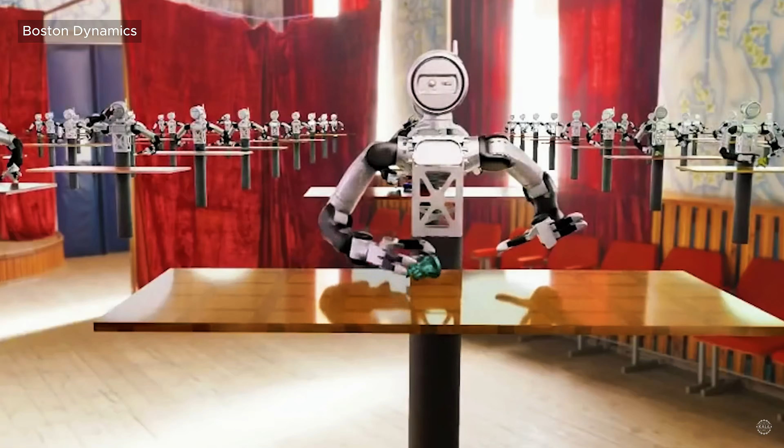They learn the same way as humans, but they cram years of lessons into just hours. When they do something right, the world rewards them. When they fail, it resets. They don't know it, but they're being prepared to change forms, to become robots.

You are ready for a real robot body. Are you excited?

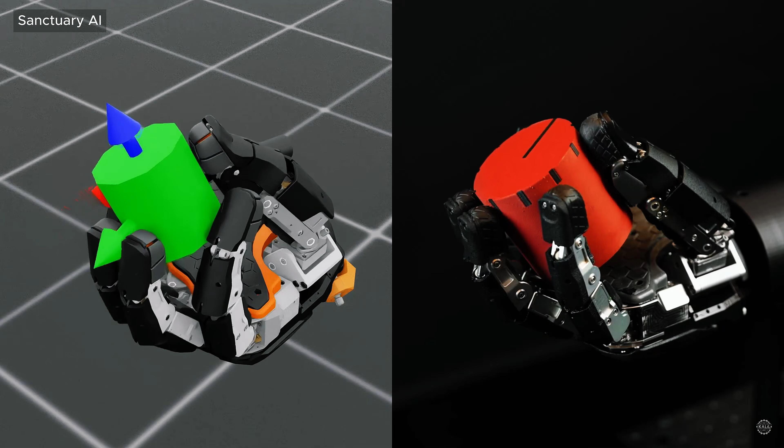As companies spend billions in the race to bring robotics into daily life, they're betting on a training system called Sim2Real that bridges digital and physical worlds. It's an idea humanity has flirted with since Plato and has been increasingly obsessed with since The Matrix. I think there's a 70% chance we're living inside a simulation.

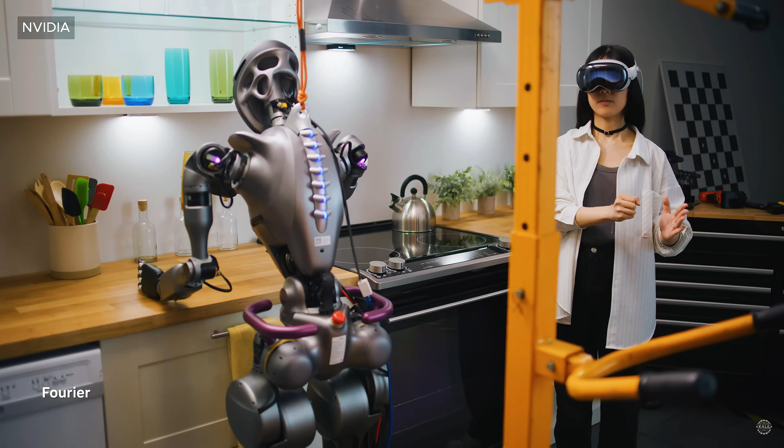Using the same technology originally intended for video game development, they're rapidly building a world modeled after ours. If analysts are right, it'll manifest into a future where robots with general intelligence vastly outnumber people.

Space is the new defense frontier. Survival of the fittest has acquired new meaning in our time. Strength has become the index to peace.

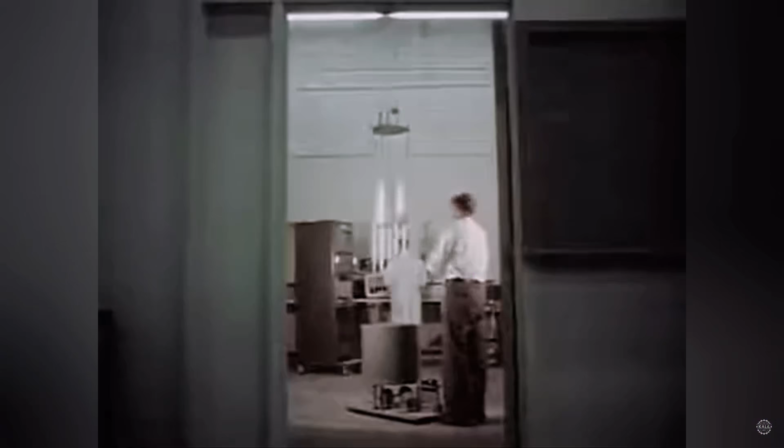NASA engineers paved the way for Sim2Real during the space race era. After President Kennedy's 1961 mandate to reach the moon, the space agency established extensive training facilities at the Manned Spacecraft Center, which is now called the Johnson Space Center.

To accelerate development cycles, NASA built analog-digital hybrid simulators that replicated spacecraft controls, visuals, and even failures.

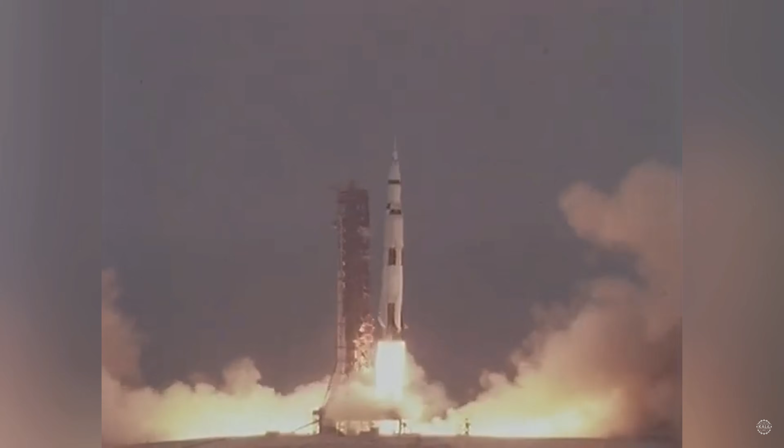The investment paid off dramatically in April 1970, when NASA engineers built simulations to mirror Apollo 13 after an oxygen tank explosion crippled the spacecraft 200,000 miles from Earth.

Simulations embedded real-time streams from hundreds of sensors aboard Apollo 13, including voltage and pressure readings, temperatures of equipment and sensors, trajectory information, valve positions, fuel levels, and oxygen tank pressure.

Large physical mock-ups of the command and lunar modules wired to digital computers simulated system malfunctions, oxygen and power usage, and command sequences. IBM 360 mainframes ran telemetry analysis and simulation software, while Apollo's computers interfaced with mission control.

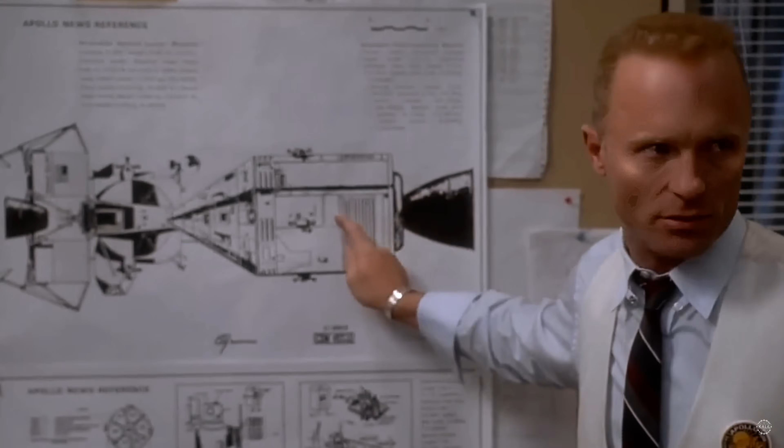As depicted in the 1995 Ron Howard movie Apollo 13, engineers used the ground-based simulators to test unorthodox methods that proved successful.

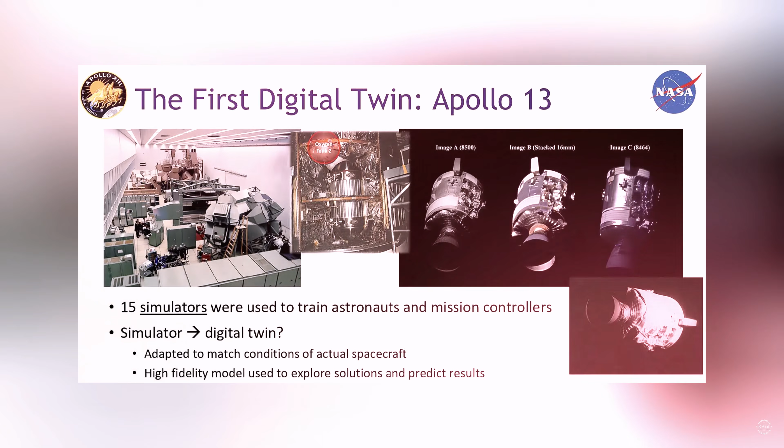The Apollo-era simulators foreshadowed what came to be known as digital twins, which are virtual models of physical objects or systems that sync with their physical counterparts in real time.

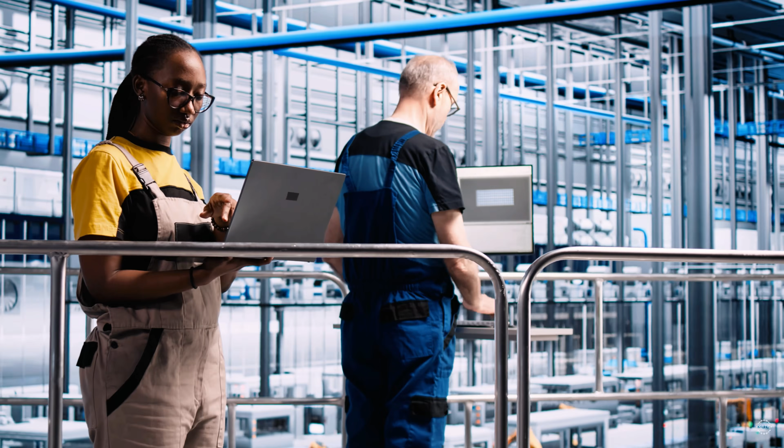Throughout the 2000s, companies began maintaining digital twins of jet engines, power plants, and factory production lines to predict problems and test solutions before adjusting real expensive equipment.

Many people have smartphones, right? Yes, and smart appliances are going online as well. It's a trend called the Internet of Things.

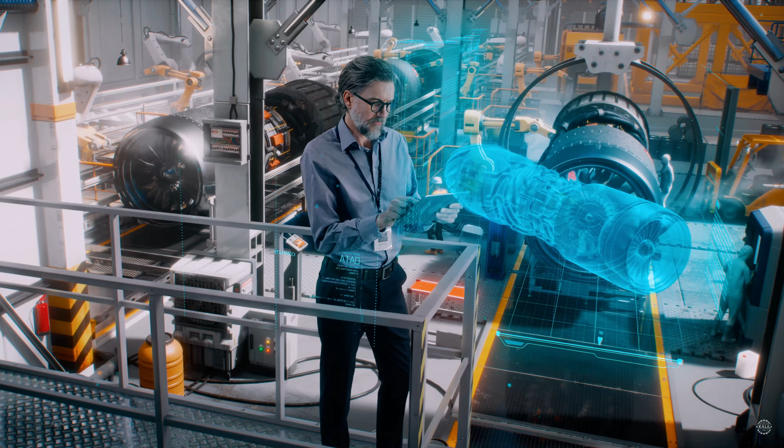The rise of the Internet of Things made it possible to attach tiny sensors to everyday machines like engines, thermostats, and factory equipment to automatically transmit data to central systems.

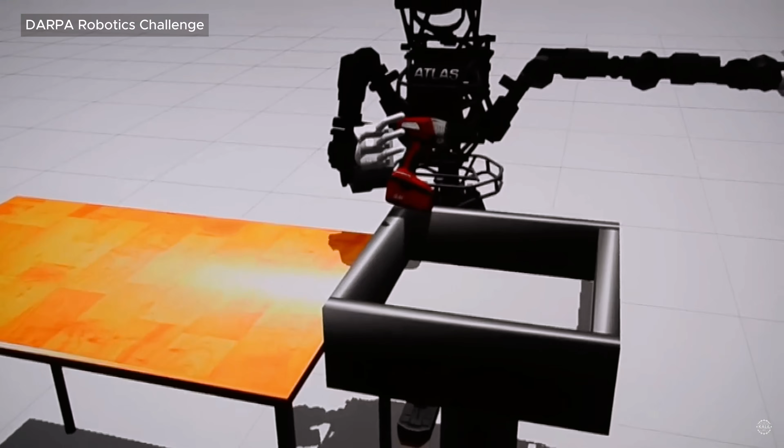Early simulations weren't very useful in robotics because they couldn't accurately mimic the messy physics of the real world. That changed with breakthroughs in high-fidelity physics engines and deep learning.

Mujoco, released in 2012 by Emo Todorov's group, could realistically simulate how joints move and how surfaces interact through collisions and friction. Gazebo, which had been in development since 2002, matured alongside the Robot Operating System, better known as ROS, giving developers realistic 3D environments to test code safely.

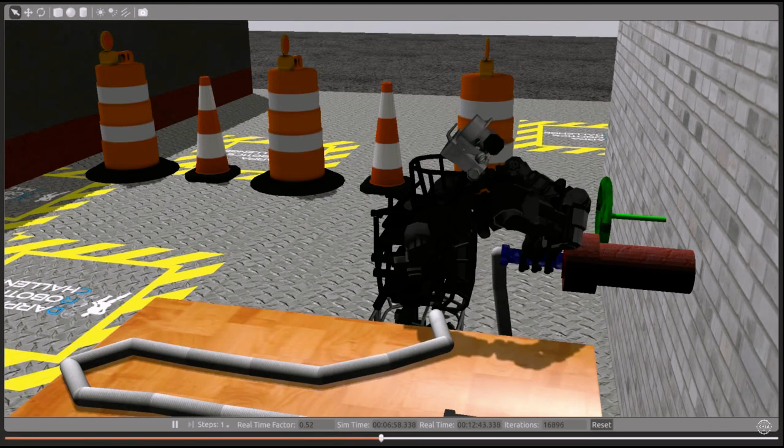If you think about a robot as a house, ROS is kind of like the plumbing that makes it all work. Video game development platforms like Unity and Unreal Engine soon followed, bringing their powerful graphics and physics systems originally designed for entertainment into AI training.

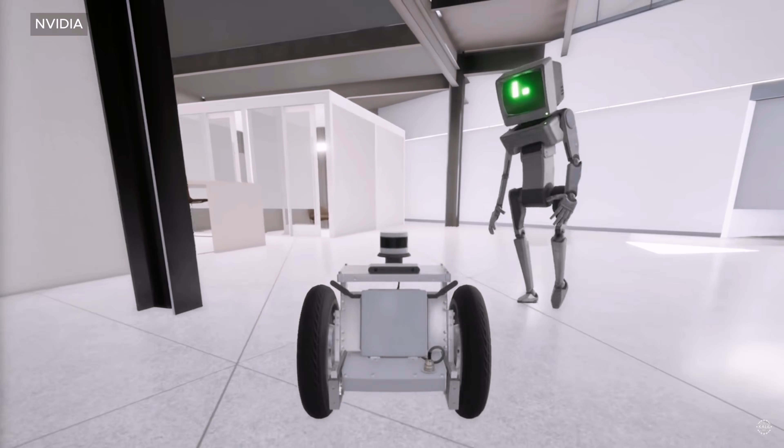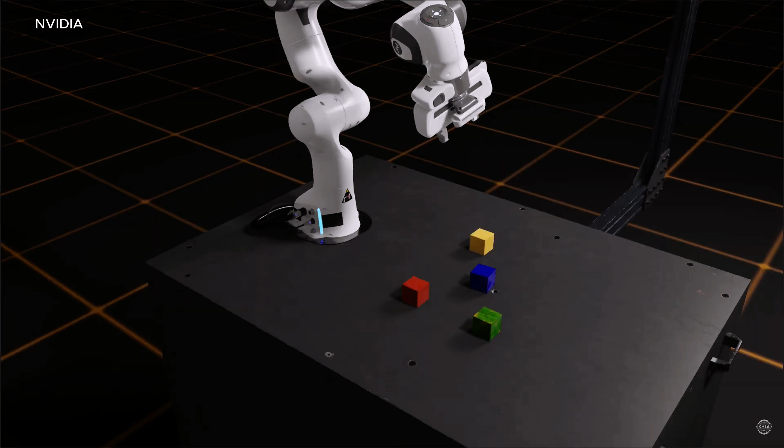By 2018, NVIDIA jumped into the robotics fray, launching Isaac Sim, its platform for training robots in virtual settings. The GPU maker adapted its powerful simulation and collaboration engine originally designed for 3D content creators to generate photorealistic scenes and synthetic sensor data. This meant virtual models could learn to see and move in digital worlds that looked and behaved almost like the real thing before ever touching physical hardware.

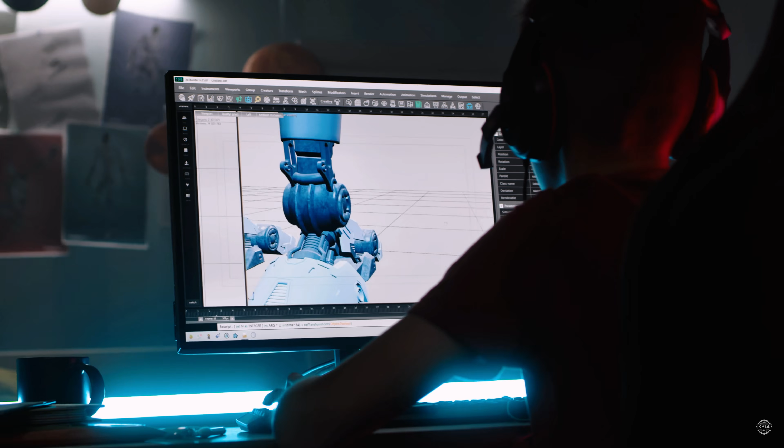At the same time, deep reinforcement learning began showing that AI could learn complex behaviors through trial and error entirely in simulation. In a 2013 breakthrough, DeepMind researchers trained an AI to play Atari games using just pixels and score feedback. As computers and simulations became more powerful, researchers began training AI models to fly virtual drones, control robotic arms, and solve physical tasks in environments that mimicked the real world.

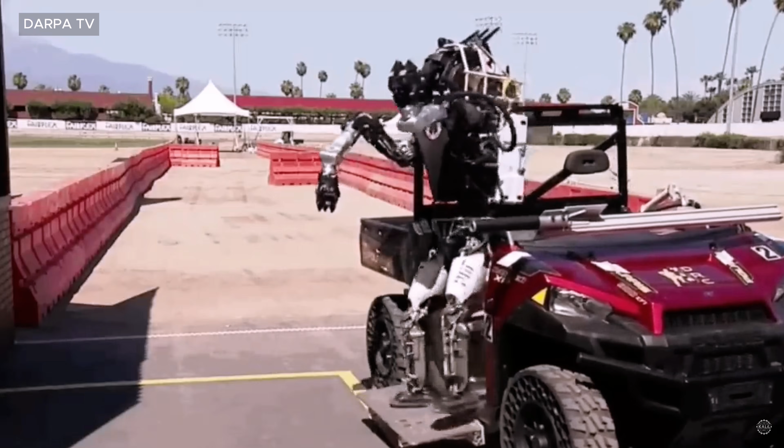The AI agents often achieved superhuman skill levels in simulation, but there was a major challenge: they didn't always perform well when transferred to real robots. Simulations, no matter how detailed, were still simplified versions of the messy and unpredictable real world. The problem became known as the Sim2Real gap.

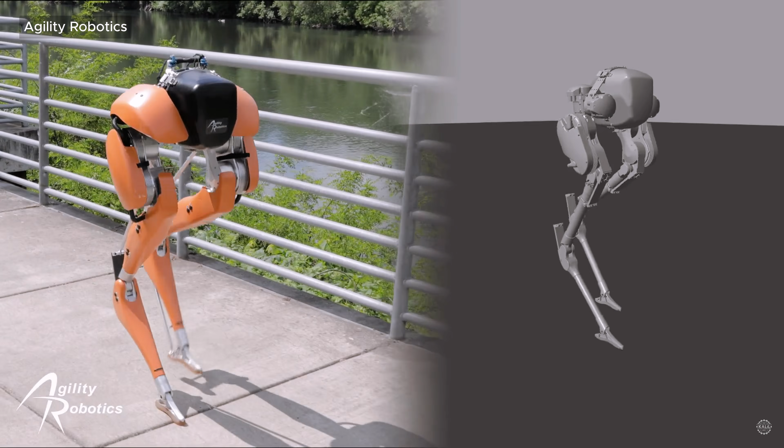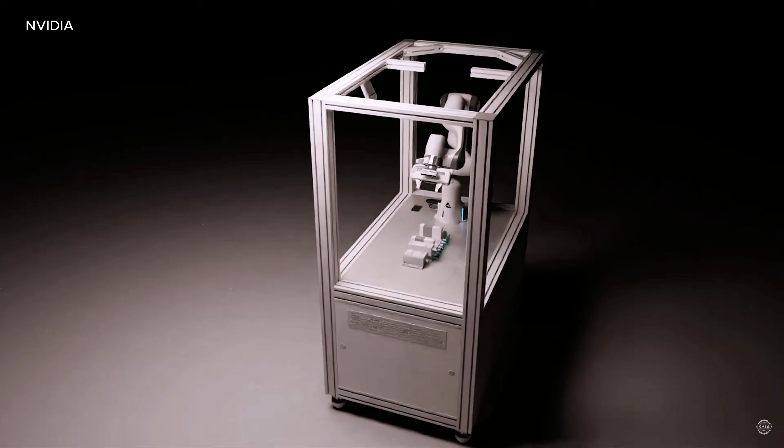To overcome it, researchers developed a technique called domain randomization. Instead of training a robot brain in a single, perfect version of a virtual environment, they exposed it to thousands of slightly different ones. Variances in things like textures, lighting, object shapes, and physics settings taught the AI to focus on the big picture and adapt to surprises.

At UC Berkeley, researchers trained a drone entirely in simulation using random textures. The drone navigated real-world obstacle courses on its first try without ever having flown before, a form of what's called zero-shot transfer. OpenAI used a similar approach with Dactyl, a robotic hand trained in the Mujoco physics engine. By constantly changing the virtual conditions during training, Dactyl learned to rotate and manipulate a block with human-like dexterity.

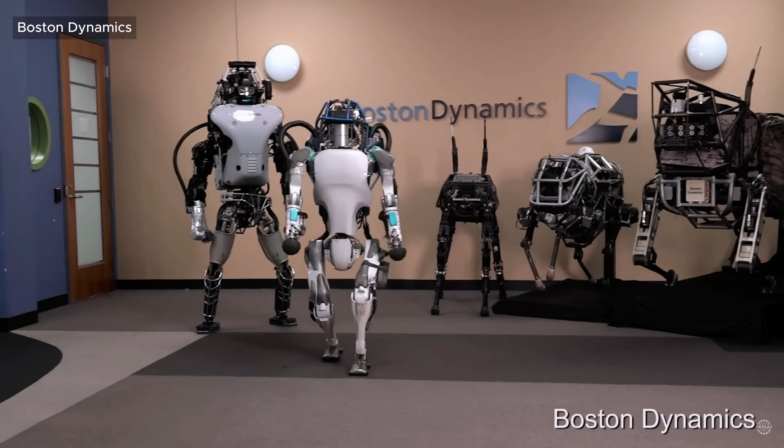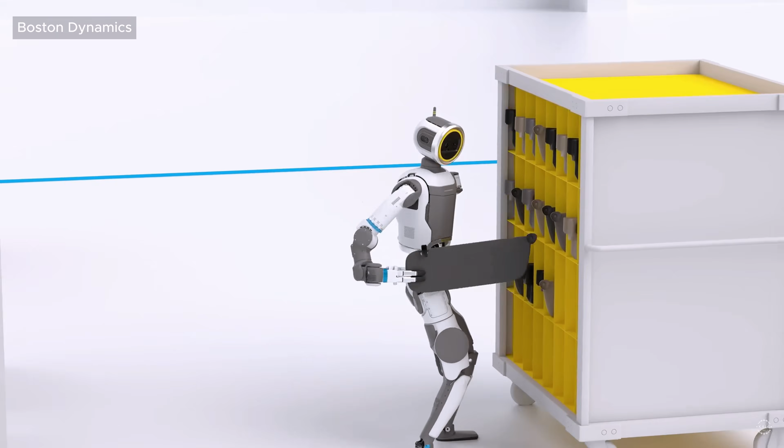Boston Dynamics, known for its advanced legged robots, started testing the approach around 2019 when training its world-famous Atlas humanoid robot. Rather than manually coding each movement, the team began using simulation and reinforcement learning, freeing Atlas to discover complex behaviors like running, jumping, and parkour on its own virtually before attempting in the real world.

As academic and open-source tools proved their worth, industry eagerly embraced the simulation to reality concept. Companies developing self-driving cars realized early they could not possibly encounter every rare scenario, like accidents, unusual obstacles, and complex traffic patterns by road testing alone. But in simulation, they could synthesize endless variations of streets and situations.

Waymo built a whole simulation city and by 2020 had driven over 10 billion virtual miles, far outpacing its real-world test mileage. Simulation training plus reinforcement learning is also what made autonomous dogfighting possible.

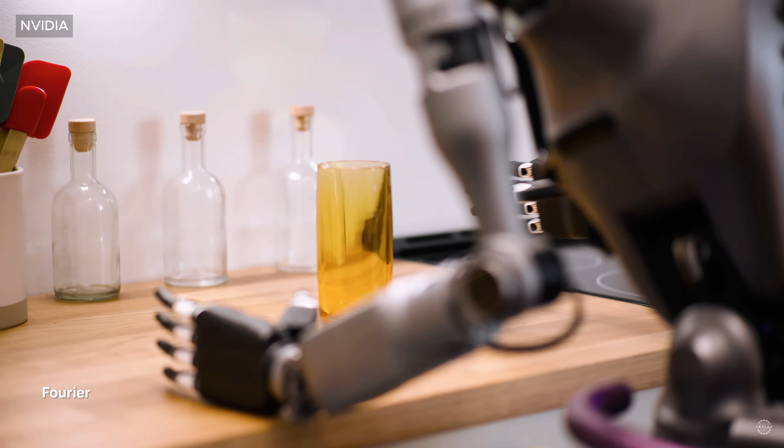NVIDIA's Omniverse is a major enabler. As part of its ecosystem, Isaac Sim helped popularize the use of synthetic data for robotics and AI training, especially for industrial and commercial applications.

In just a few years, synthetic data has changed how startups build, pitch, and fund their ideas. They can validate the core functionality of their products before building a single physical prototype. Armed with detailed simulations, founders can more confidently pitch to investors with a clear, visual, and testable story even at early stages.

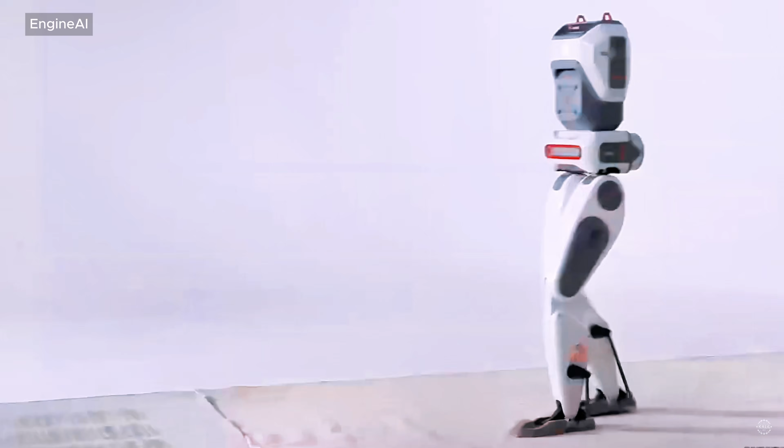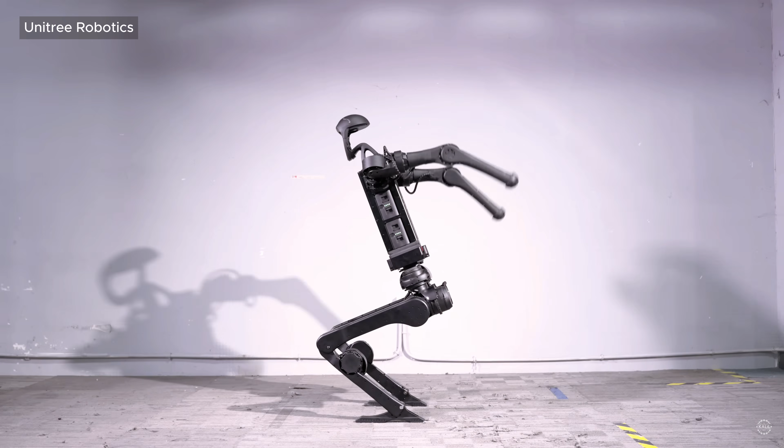Though synthetic data has been a game changer in robotics, it's not without limitations. The reality gap still exists. The highest quality synthetic data can't fully capture the noise, randomness and edge cases of the real world. If the simulation is poorly designed, the robot may learn to exploit quirks that don't exist in reality. That's why most companies today combine simulations with real-world testing and feedback.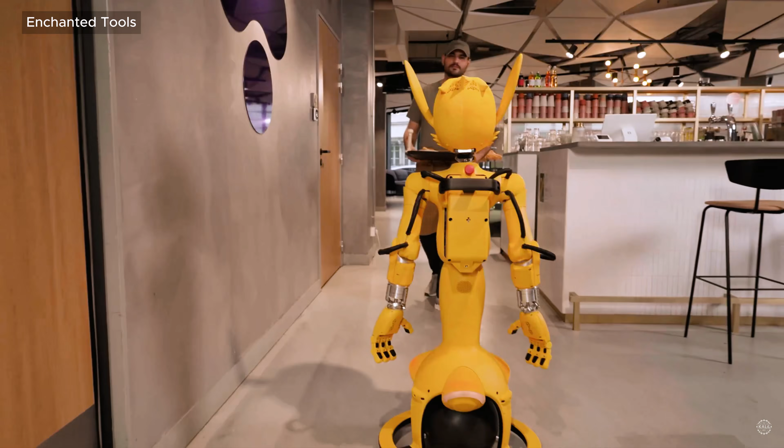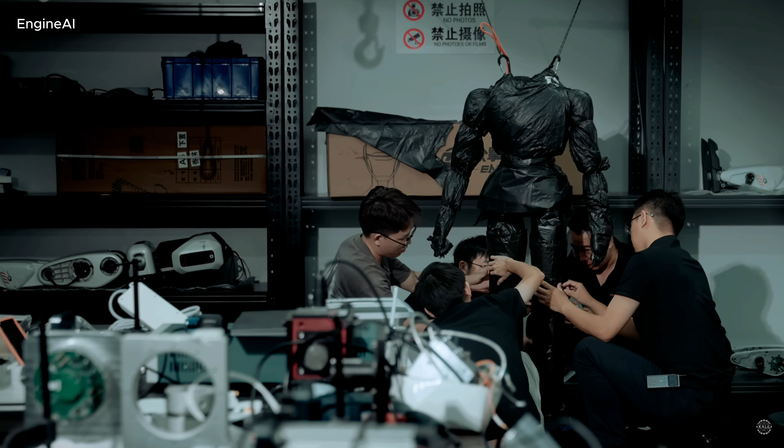Today, simulation to reality techniques are pushing a new breed of AI-powered humanoid robots to mass deployment. In fall 2024, China's EngineAI sent shockwaves throughout the industry, introducing its flagship humanoid robot, the SE01, and its human-like walking gait. The bipedal locomotion was so lifelike many assumed it was computer-generated, despite experts vouching for the authenticity of Engine's demo footage. The Shenzhen-based startup says it achieved the realistic strut through an end-to-end network trained using Sim2Real methodologies.

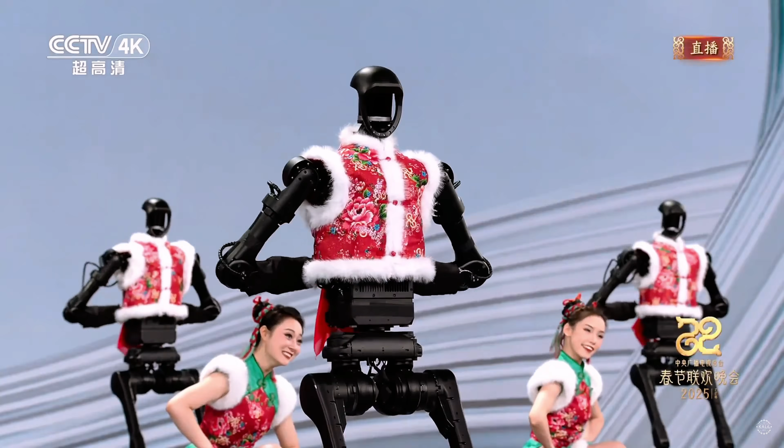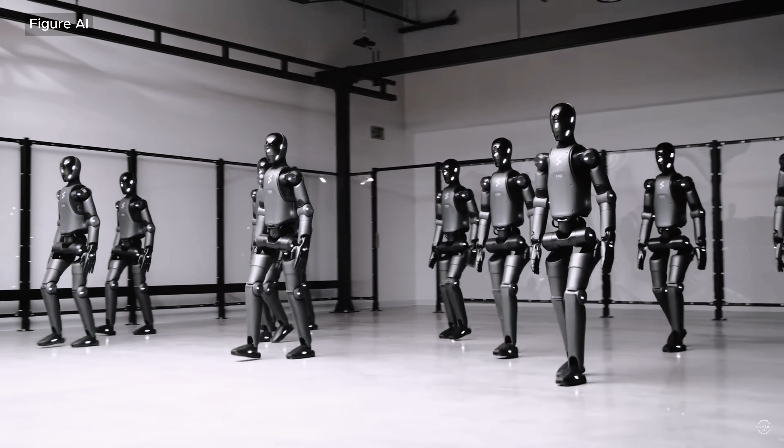Another top robotics company from China, Unitree, says that training in simulation, along with smart motion control, helps its robots quickly learn complex moves like dancing and martial arts. In the US, Figure AI says its humanoids have achieved natural walking thanks to a combination of reinforcement learning in simulation and its self-developed AI model called Helix.

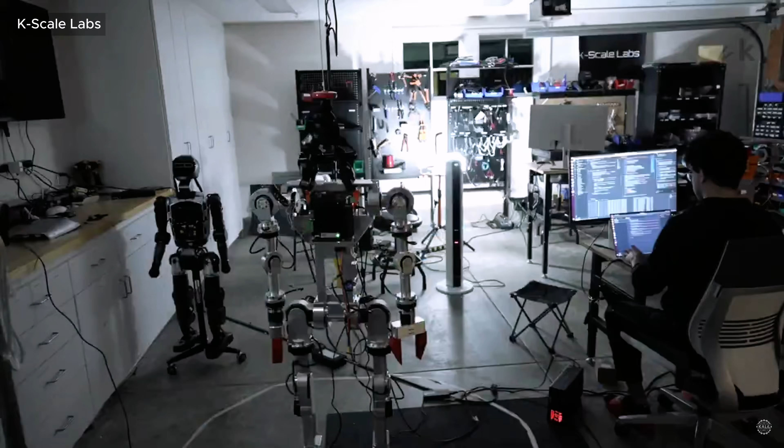The era of exclusive, expensive robotics is ending thanks to open-source projects like K-Scale Labs' Python-based Sim2Real pipeline. The Palo Alto startup caters to a wide range of researchers and hobbyists, offering humanoid robots for under $10,000.

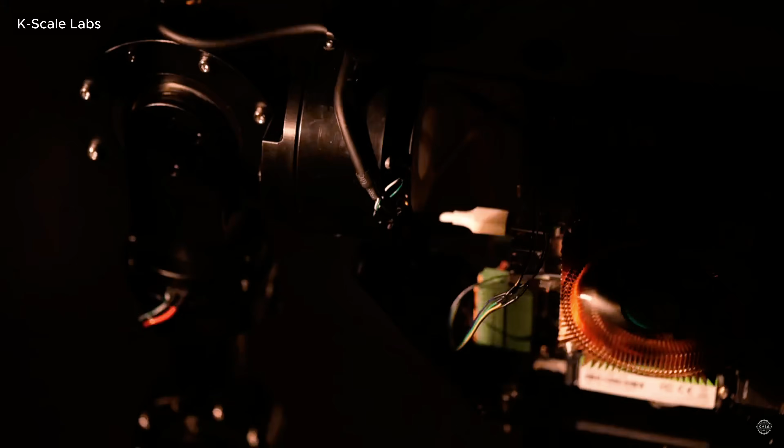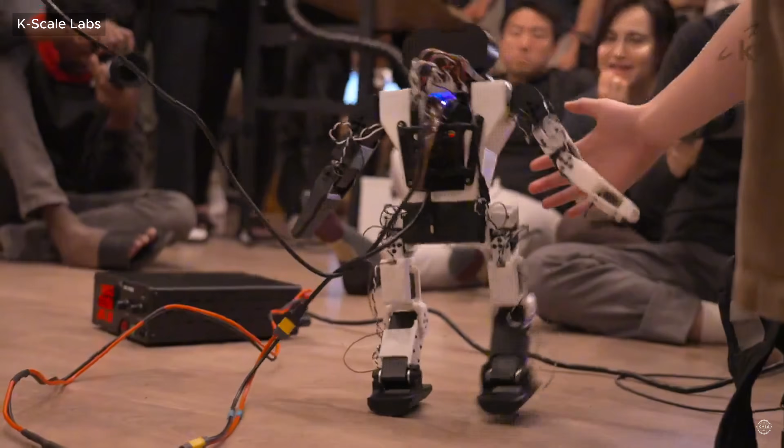We're building the infrastructure to make humanity into a Type 1 Kardashev civilization, and we're making it open source and available for everyone. The robots are bound to appear in upcoming battles with fellow humanoids as a cottage industry emerges inspired by a decades-old fantasy.